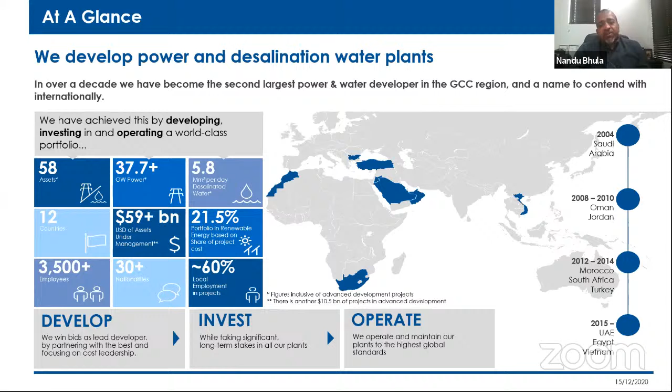So theoretically, South Africa has abundance of DNI capability, and therefore it is of course natural that we would look at construction and operation and inclusion in our energy mix, particularly given the history of South Africa being a coal-dominated technology country, and renewables now coming into the fore. And we're hoping that CSP continues in that light.

So just to give you some feedback in terms of the number of plants in the world, we're looking at about 3.5 gigawatts of plant under construction and already 6,000 megawatts in operation. And so the future is definitely bright as far as CSP is concerned. And just to give you some feel of what can be done, in ACWA's fleet we have two very impressive facilities. The first one being the 510 CSP project in Morocco, in Ouarzazate, made up of 2 parabolic trough plants and 1 tower plant. And that is, of course, the largest single CSP facility in the world right now.

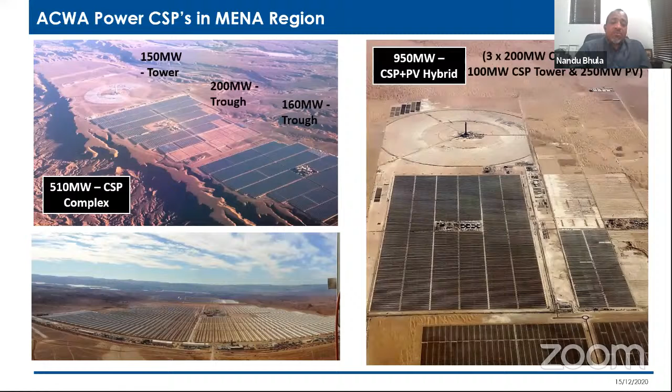And then, of course, within a couple of months to come, this would have been overtaken by the renowned Noor 1 energy facility in Dubai, where we have a different combination. We have three trough plants plus a tower, total 700 megawatts, and then additionally a PV hybrid facility, which we now see as the new future for the combination of CSP and PV.

To take it closer to South Africa and getting to Bokpoort, which we will then go into detail with: in South Africa, when the Department of Energy started procuring for power and bringing renewables in, they started the REIPPP program. Everybody knows the REIPPP program is one of the most successful programs in the world as far as energy procurement from the renewable sector is concerned. We had 5 progressive rounds, a total of 6,300 megawatts, and 92 projects in total spread across the country.

In terms of technology, the solar projects were dominated in the northwestern part of the country, which is where our high DNI radiation and GHI is. And then on the south coast and the east coast, we're looking at our wind projects. But in total, I think we have had significant improvements in terms of the technology integration into the network. We've had close to 200 billion rand invested over this period, and over 110,000 jobs per year created, which was, of course, the intent behind this program.

Bokpoort was one of them, and if you look at the table below, of the 92 projects, there were in total 7 CSP projects that were procured over this period, which is exciting for us in South Africa. I think it makes South Africa one of the leading countries where we hopefully will have operational CSP focus with regards to developing the technology further. And you're looking at bid window 2, which is the second round of the procurement program, when Bokpoort was procured at 50 megawatts.

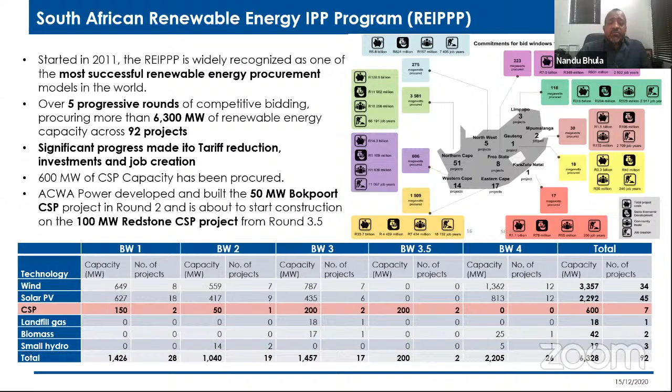So just to give you some more details in terms of the different plants in South Africa, there's 7 in total, and I want to really focus mainly on the thermal storage capacity, which I think is one of the key factors in terms of the discussion that we're having today, in terms of dispatchability and 24/7 operation.

And as you can see in the first round, the projects were looking at around 2.5 hours of thermal storage capacity, which allowed for, in the South African market, to cover the peaks, but not quite more than 2-3 hours of the peaks. And then Bokpoort was, I think, revolutionary in terms of that discussion, because immediately we came in with 9.3 hours, and we had a specific target in mind, and I'll explain that just now.

And then subsequently, the other plants came in with around 4.5 to 5 hours of storage to meet the demand, as the understanding of the capabilities of CSP was clearly appreciated. And then our plan is, of course, with Redstone to really go with the 12-hour storage, and now taking it into the realms of a baseload operator.

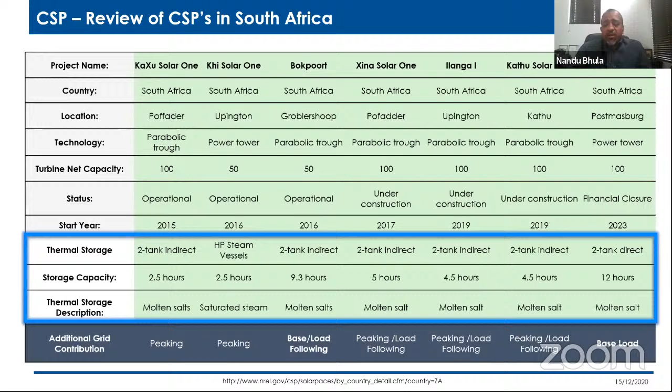So as we see now, we believe that the shorter thermal storage options are therefore sort of a peaking kind of technology contribution, and the longer hours in terms of what we have at Bokpoort, for instance, 9 hours, are more seen to be close to baseload kind of load following, and we'll show how that was realized later in the presentation.

So in terms of the two projects for ACWA, we have Bokpoort, which is a 50 megawatt parabolic trough plant, essentially 9.3 hours of thermal storage, which was the key dominant factor that sets it apart from all other projects. And we're looking forward to setting new production records with it, and we'll explain some of them shortly.

And then our second project, of course, is Redstone, which is the 100 megawatt tower project. We will be bringing in 12 hours of thermal storage in there, which will then therefore be able to do more of what we will show Bokpoort has already done.

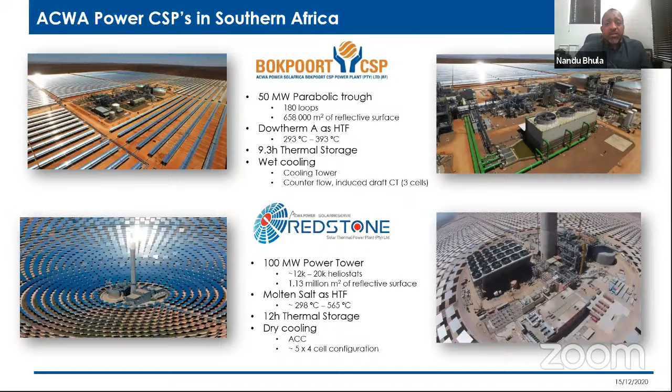So, Nandu, thank you so much for that introduction and for setting the scene. I would really like to now go through some of the specifics at Bokpoort and explain how we actually achieved the 24/7 operation, and also just focus a little bit on the great benefits that CSP technology with thermal storage actually provides in the country and in the industry in general.

If we look at the CSP technology, just a quick reflection, the collectors focus the sun rays on the tubes that have the heat transfer fluid, HTF, and that is then heated up and ultimately turns water into steam, which is used for turbine generation. But during the day, it is also used to charge the salt system. At night, when the sun is not there, the salt is then discharged. That in turn heats up the HTF again, and the same cycle is then utilized to generate steam for the turbine.

The CSP parabolic trough really offers great advantages in the sense that it's a proven technology, and it's got an operational track record. It's also quite a mature technology and can literally be delivered in 30 months. And as the maturity grows, that period can even be made shorter. It also creates a huge opportunity for local content, and we will talk a little bit more about that later on. And the only slight disadvantage is really that because of the extensive piping work required in the solar field, there is some energy loss associated with that.

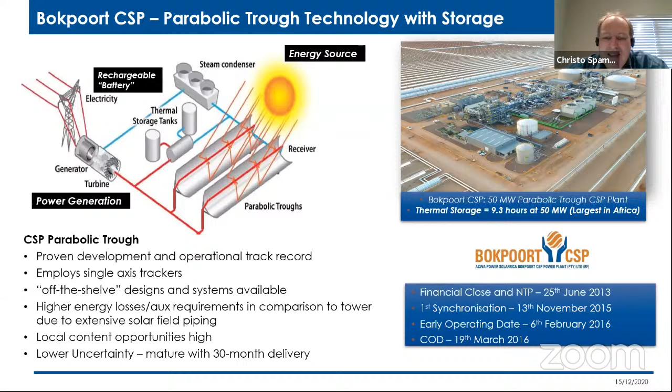Just some of the important dates and milestones for the Bokpoort project. Financial close was reached on the 25th of June. And the first synchronization was on the 13th of November, which incidentally was also a Friday. Many people believe that anything that happens on Friday the 13th brings bad luck. But in the case of Bokpoort and within the Bokpoort family, we believe that's quite the opposite, given the performance of Bokpoort during the years. Commercial operation date was then the 19th of March 2016. Just some technical elements of the plant.

The solar field has got 8 solar fields, just short of 242,000 mirrors installed. The trough technology is provided by SENER, and it was the first version of the SENER trough technology that was employed at Bokpoort. Steam generation is a single reheat Siemens turbine, and the steam is delivered at a pressure of 103.6 bar at 380 degrees Celsius at turbine inlet.

More importantly and more unique about Bokpoort is the thermal energy storage, which allows us to bank solar energy during the day and to release it at night. In order to achieve this and to make this happen, we've got the two large hot and cold tanks, and just in excess of 38,000 tons of salt.

With regards to site location, again, as Nandu has indicated in his presentation, mainly the area was chosen because of the DNI capability, and other factors also considered was, Bokpoort is a wet cooling power plant, so we needed access to water. This is obtained from the Orange River, and then of course the plant is located close to an Eskom substation, so that the electricity can be evacuated. So those are some of the considerations for the plant location itself.

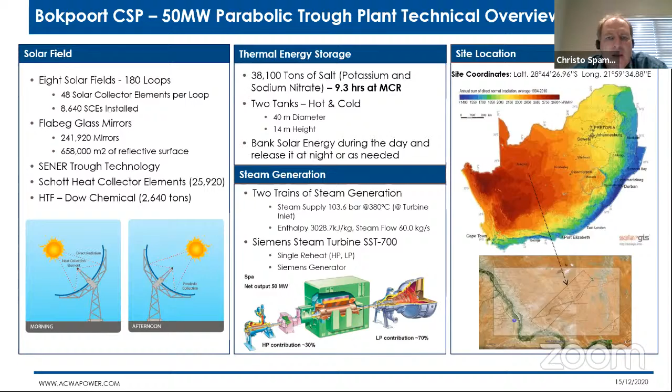Talking about records, immediately after commercial operation, the plant has already demonstrated that it can perform quite well, and it had a continuous run of 161 hours, which equates to 7 days. That was immediately after commercial operation. There was then a short break due to weather conditions, and operations resumed again for 111 hours, which equates to approximately 5 days.

Right now, where we are at with Bokpoort is a very important stage in the project. We started negotiations with the lenders a few months back in terms of refinancing of the project. And one of the key CPs for the refinancing was then to demonstrate and exceed on the design case for the plant. So during June, we had a very focused outage just to address some of the teething issues.

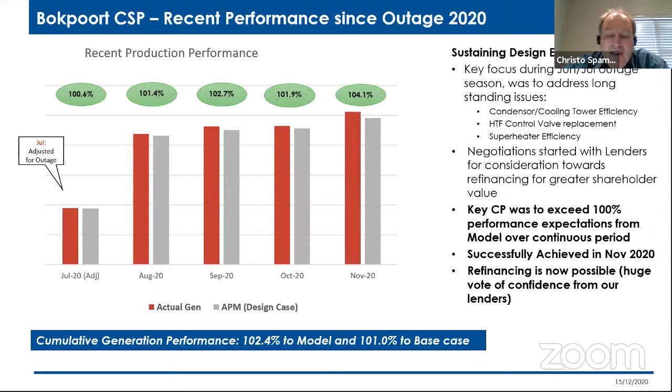And since the plant has returned from the June outage, over the past 5-6 months, it has demonstrated consistent performance, and it has outperformed the design case by 2.4%, and this was achieved towards the end of November. This is really a great achievement, and in us meeting this particular CP, and of course many others as well, I'm very delighted to also share with the audience today that we have successfully closed the refinancing deal yesterday, the 14th of December.

If we then also look at some of the other records that were achieved over the past couple of months by Bokpoort, we've set a new all-time daily record of 1,077 megawatt hours. We also set a new all-time winter record, as well as consecutive running for 3 days, 7 days, 10 days, and then the 13-day continuous operation record I will talk a little bit more about. Of importance here is also that we are very focused to average around 1,000 or more megawatt hours per day. And this then allows us and sets us up for the continuous running, which we will talk about.

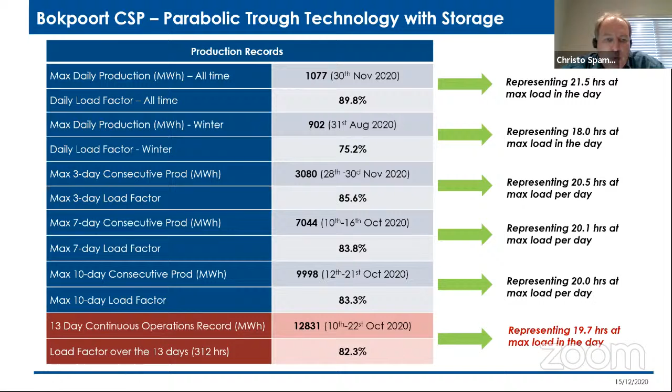In terms of the 13-day record that we've achieved, or 312 hours, the graph here demonstrates how this was really achieved. So during the day, we would use the energy from the solar field to run the turbine at about 50 megawatt. At the same time, the salt will be charged. And at night, when the sun has set, we will use the energy from the salt in terms of discharging the salt, and then run the plant at about 40 odd megawatt. In the morning, there will be a transition again, and then the process is repeated.

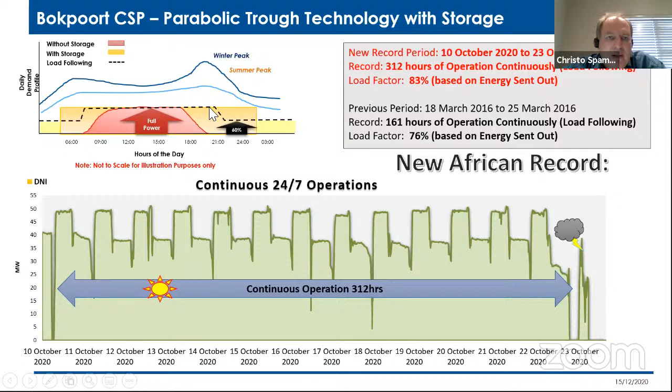And as indicated before, this really helps us then with a load profile of base load, which is very important, and also being able to supply energy during the peaks of summer as well as the peaks of winter. And this is done by the load following capability that the plant has got.

Just to demonstrate a bit further in terms of how the transitions for 24/7 operation are achieved, if we look at the production summary and the graph here, if you just follow the red line with me, you'll see that during the night we run at close to about 40 megawatts. This is achieved based on the salt that is then discharged during the night. If you follow the green line, you can see here's the discharge of the salt.

And in the morning, when the sun rises, we are then able to utilize energy from the solar field again to run up the turbine to a higher load of 50 megawatt net. And at the same time, during the day, the energy from the solar field is also used again to charge the salt. In the summer days, we are able to charge the salt to 100% capability.

In the early evening, there's the transition period. And then again, by discharging the salt during the evening, we are able to run the turbine at loads in excess of 40 megawatts. And then also when lower demand is required, we can reduce that even further. But this is really a typical summer's day and a typical demonstration of how the plant and the thermal storage capability is then used to run the plant on a 24/7 basis.

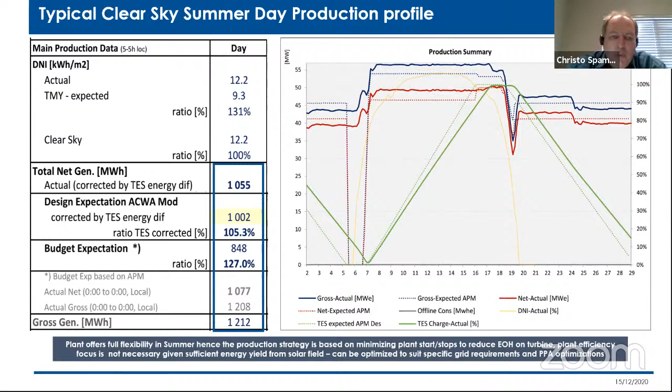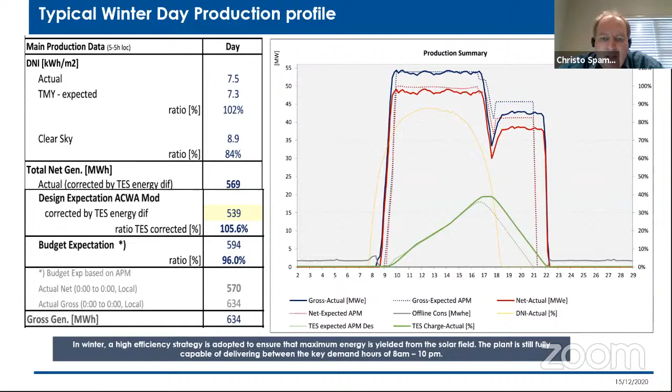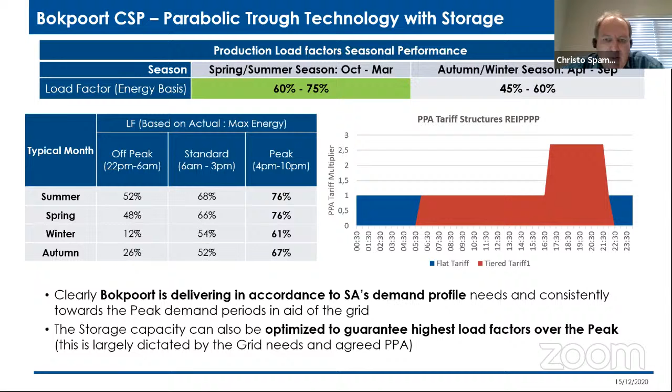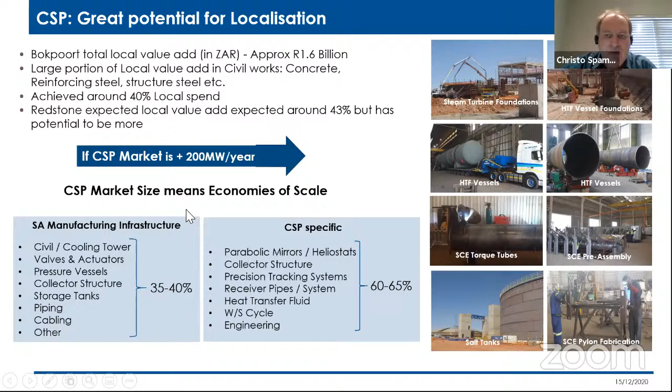During the construction and few operation years of Bokpoort, the project has already achieved a number of awards in terms of being the African Community Project of the Year. In the energy sector, it achieved awards for innovation and for socio-economic upliftment. The socio-economic development is very important for us and will continue to be important for us. We live and work in the community, and therefore we would like to look after the community as best as we can through our socio-economic development initiatives. Here are just a few that have been listed.

There are some projects in terms of solar lighting for homes, providing drinking water to homes, and then very important and close to our hearts is skills development, which really starts from supporting creches in the local area, supporting schools in the local area, and also having a number of bursaries on further study programs. There are also lots of training initiatives, apprenticeships, and so forth. And we're also quite proud to say that from a local employment point of view, about 60% of the operations team is currently employed locally from the Kai !Garib municipality.